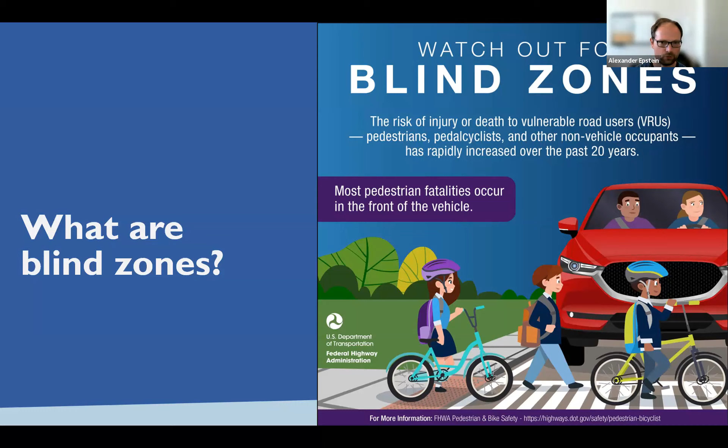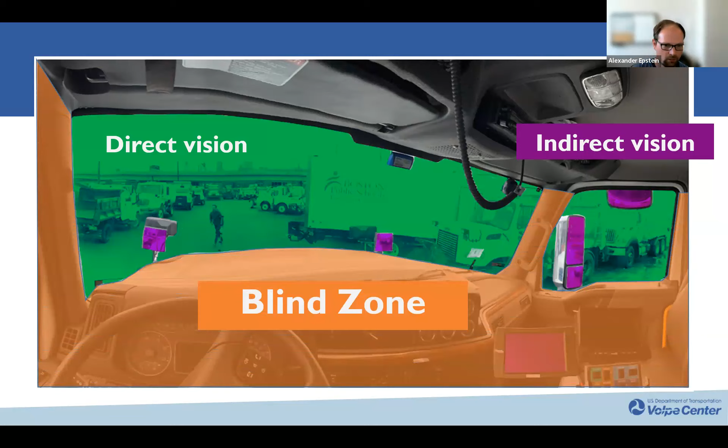So where's the blind zone then? Well, that's everything else. The blind zone, shown in orange, is where the vehicle physically obstructs the visibility of anyone outside the vehicle to the driver. This blind zone can vary a lot in shape and size, and especially in towns and cities where the roads are shared, this can be a pretty big challenge.

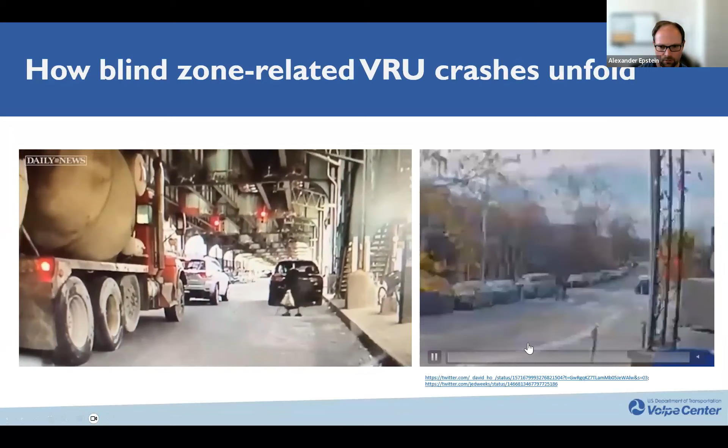The way this can actually play out in real life is multiple ways, either in turning crashes, or these can unfold in vehicles starting from a stop. These can be really horrible situations that are preventable at the end of the day. Now, the person on the right who was struck by the driver of that large pickup truck during a left turn was able to walk away. The woman who crossed in front of the cement truck on the left did not walk away. These are just two examples of how blind zone related crashes can unfold.

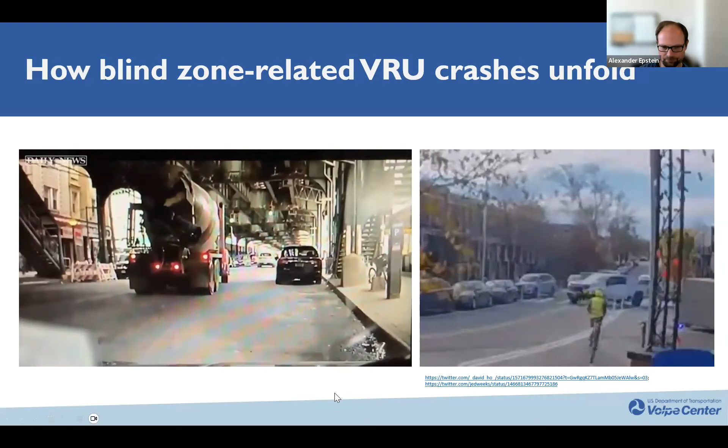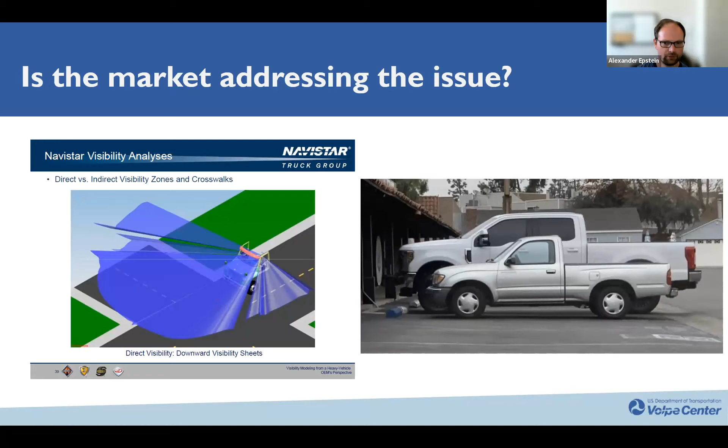One reason it's really important to do that, as opposed to, for example, seeing people through mirrors - you can put up more mirrors for sure, but the reaction time, based on the research, is going to be 50% faster if a driver can see with the naked eye. If they can see a person outside, they can stop significantly faster, and that can be the difference between running the pedestrian down, or not.

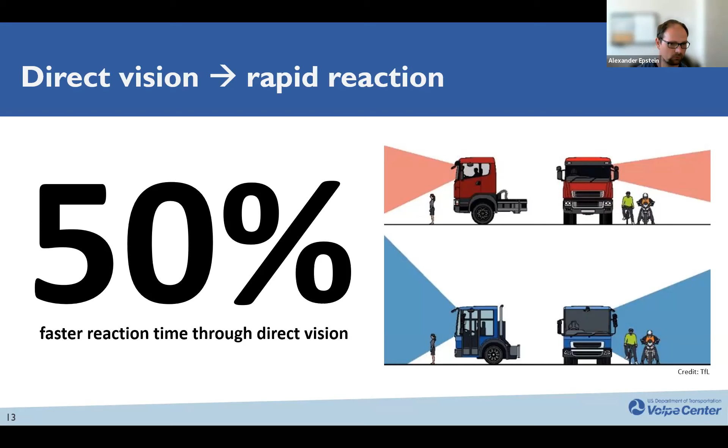To put some numbers around this, the data has challenges and imperfections. But what we do know, based on the best available data, is blind zones are at least the second leading cause of truck-pedestrian crashes in the UK, and at least 1 out of 4 fatal crashes between pedestrians, cyclists, and large trucks in the United States. This is something the NTSB has addressed in the past, issuing recommendations about 10 years ago.

Piecing together what we can, we can put a lower limit of at least 650 fatalities a year, at least 15,000 injuries. In my professional opinion, that number is likely significantly higher.

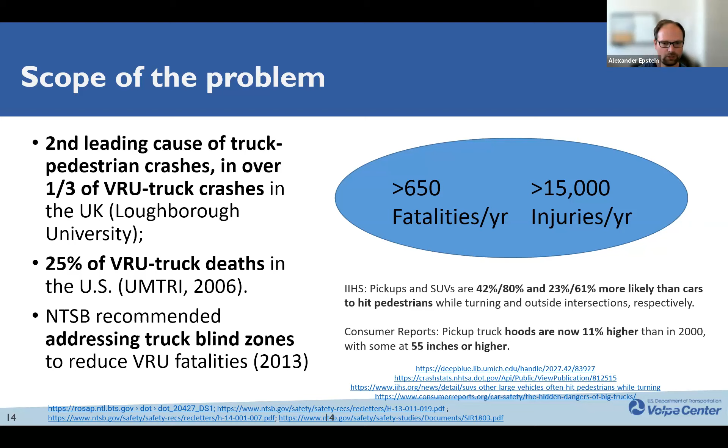The Insurance Institute for Highway Safety and Consumer Reports are all starting to see this, and in their analyses, especially pickups and SUVs being more likely than cars to be in crashes involving pedestrians, especially when turning. And we know the pickup truck hoods are getting taller, not shorter.

So how does this play out? I showed you a couple of videos there. I hope they weren't too disturbing. The point is, I hope they're valuable just to understand how these crashes unfold, and why, again, blind zones are a key factor. So this is something that hopefully will come through.

I'm going to show these two videos. This is from a driver simulation study that our group led last year and published in a paper. These are the exact same simulated crosswalk at a signalized intersection, with people crossing from right to left, left to right, and then the signal's about to change from red to green.

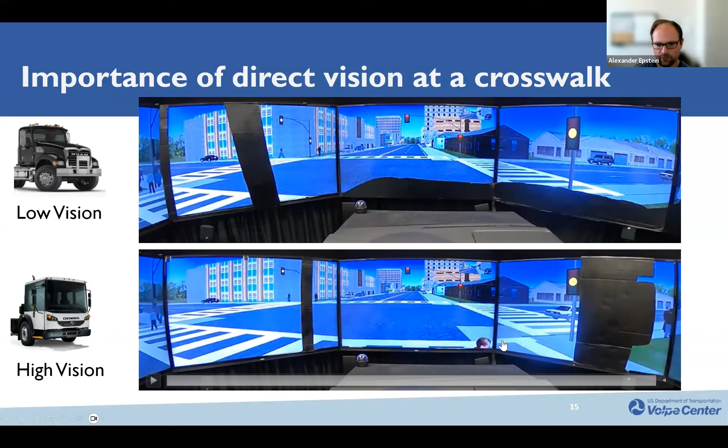The other person in the simulation is sitting in a high vision truck, designed more like an MBTA bus, for example. These are commercially available, and have been for decades in Europe, but at least in the last few years, also in the US. So the little boy there is stranded - what do you think happens? Out of 15 times that the simulation is run with 45 different human subjects, some of whom were professional truck drivers - though the truck drivers didn't do any differently than regular people - out of 15 times, they could have run over the pedestrian in the crosswalk.

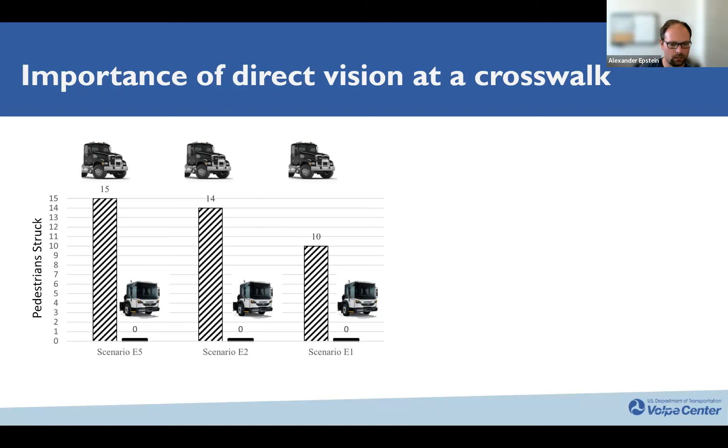The drivers of the low vision truck, when there were five pedestrians crossing, or only 2 pedestrians crossing, ran them down 14 out of 15 times. Even when there was only one person to keep track of, someone entered in front of the vehicle and didn't make it out the other side, they still ran them down 10 out of 15 times when the light turned green. This is in contrast to 0 out of 15 times in the high vision truck. So direct vision really made a big difference, and this is described in our paper published last year in TRR.

There's no reason to believe that it would be any different of an effect with a large pickup truck as opposed to a commercial truck.

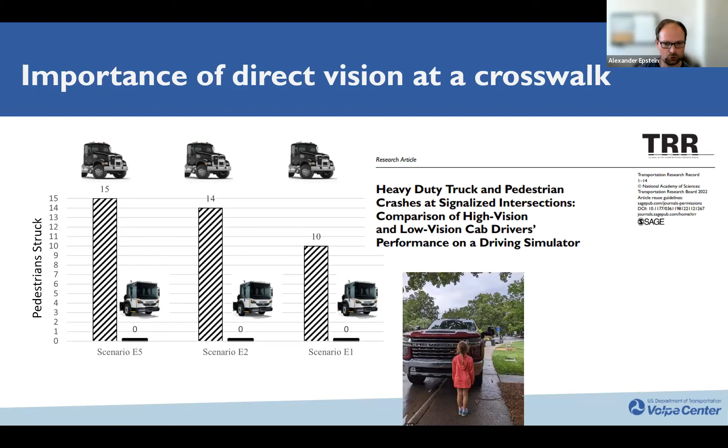So if we all agree that direct vision is an important consideration for the safety of vulnerable road users, people on the outside of the vehicle, how do we measure those blind zones and the amount of direct vision afforded to a driver? Well, that's the purpose of this tool that we've been working on, first started as a university partnership, and then we've been working on it since 2018.

This is a free tool. You can go online, and I'll put the link in the chat. You can enter any vehicle. You have to sit in the vehicle and take a panoramic photo from the eye point of the driver and take a couple of measurements.

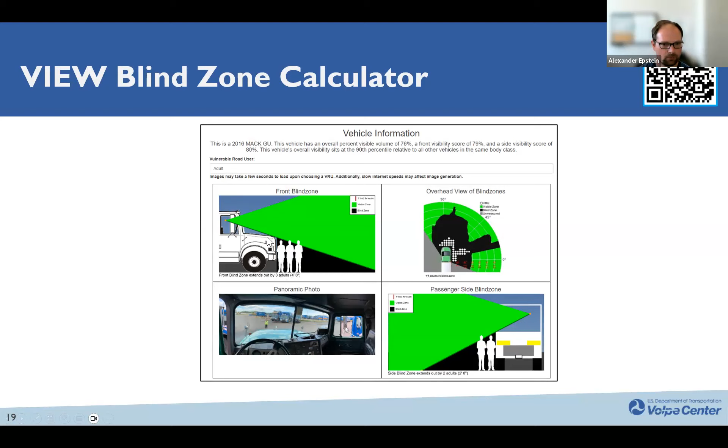What it provides you is an estimate of how many adults, children, people in wheelchairs, or bicyclists, either adult or child, can fit in the blind zone forward, to the right, and ultimately all around the vehicle. Just to decode what the outputs of the tool are...

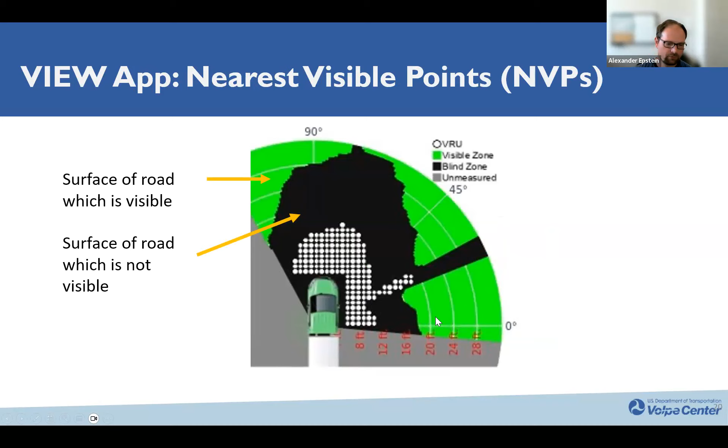This green area is where the surface of the road is visible. The black area is where the surface of the road is not visible. Each of those white dots represents the type of vulnerable road user you've selected—in this case, elementary school children—that could be tiled shoulder to shoulder and still not be visible to the driver in that vehicle. Here it's estimated that 176 elementary school children are not visible, and the road is estimated to not be visible out to about 24 feet in front of that truck.

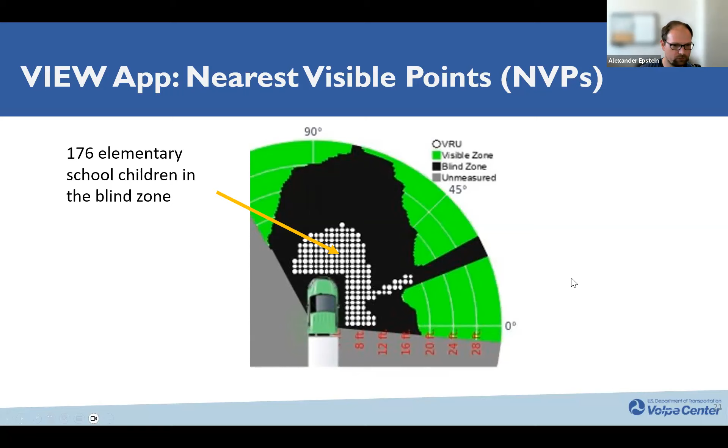So there's a QR code, and I'll also share a link. I thought it might be of interest to you all to share what different groups around the world, and closer to home, might be doing around this safety issue.

For SUVs, pickups, and cars, there's a United Nations regulation called Forward Field of Vision, UN Regulation 125, that governs the minimum field of view. The same is true now for large trucks—it's UN Regulation 167, commercial vehicle direct vision. But those are not abided by in the US market.

So there are a couple of other US standards—well, there's one that I'm aware of, which is the APTA bus procurement guide for transit buses. The American Public Transportation Association does have a forward field of view requirement: you have to be able to see a certain height pole at a certain distance in front. It's a very simple test.

London has really been the leader globally, and they were the instigator for that UN Regulation 167. They started back in 2016-17 implementing a direct vision standard, which came into full force last year. That requires trucks entering the capital district in London to adhere to a minimum visibility so that they can see, especially bicyclists, but also pedestrians outside of the trucks.

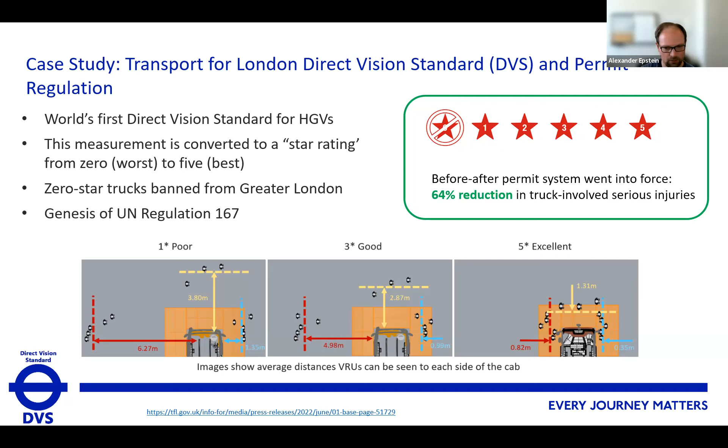Montreal has also been working on this—how do we bring this to North America? They've been thinking about mapping the visibility to different intersections in downtown Montreal. That's a relatively recent conversation we've been having with Quebec.

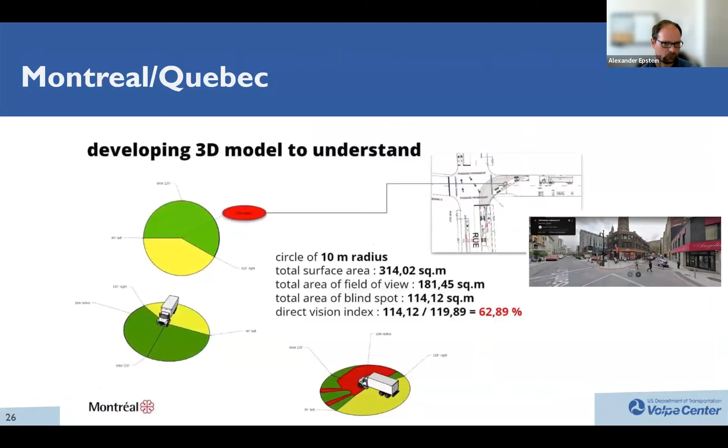Once we know this, there are a couple of approaches. We can change the design of the road. There's a whole toolkit that, depending on where you sit—whether you're responsible for geometry, pavement markings and operations, traffic control devices, or planning priority networks like safe routes to school, bike networks, and truck networks—you can start thinking about.

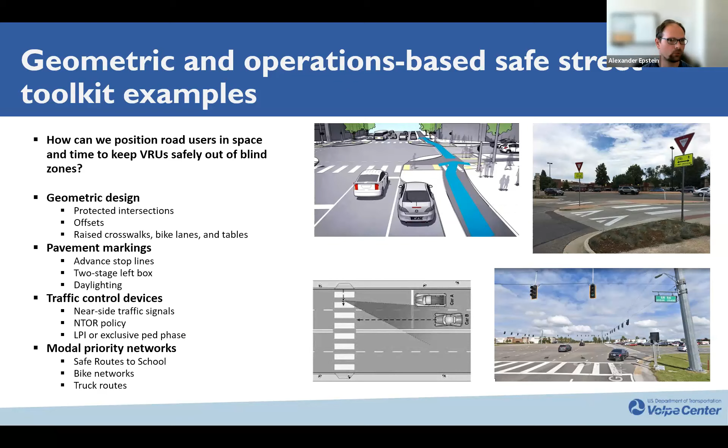If we take the vehicles for granted that they're getting larger, and we have to be aware of their blind zones, there may be ways we can position road users in space and time to keep them safely out of those blind zones. Seattle is an example of a place that has done just that.

It's called Marginal Way—a single corridor from Seattle to south of Seattle through their industrial zone, with no alternative for either the truck or bike priority network. So they are accommodating this. They've spent significant resources to bend these multi-use paths around. You can see in the satellite images those large blind zones of trucks entering the ports.

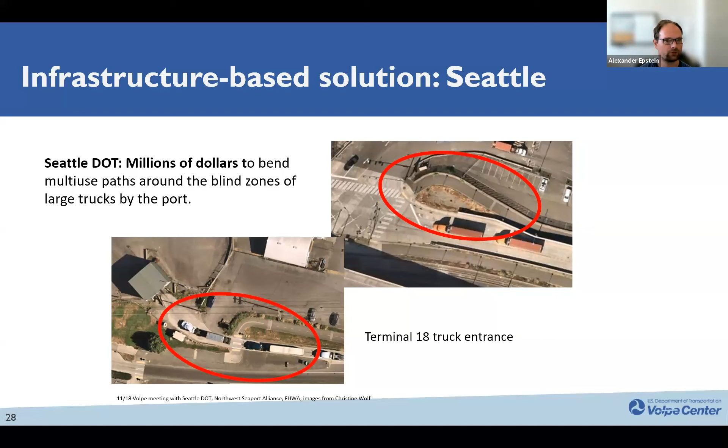Now, you maybe can't imagine doing this in downtown Boston or Framingham or anywhere else, necessarily, because of the real estate. But that's the kind of geometric solution you can imagine with the vehicles we have today.

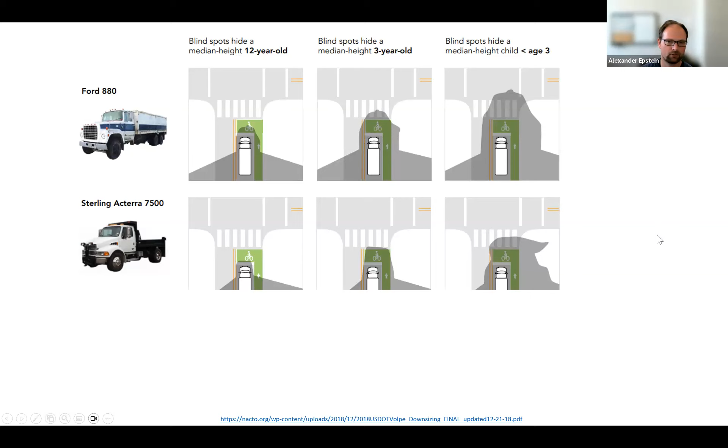If you haven't read these two reports, we talk about this and about direct vision, especially in the downsizing one that NACTO put out a few years ago. Some of that analysis is still pretty fresh—this was before we had the View app. I think it brings together how this is both a vehicle design and a street design challenge. If you start superposing where those blind zones fall on bike lanes and crosswalks, it can be fairly eye-opening, just how different those are even across two different dump trucks.

And never mind if we start asking, well, what about tomorrow's vehicles? Let's say you have this type of electric truck—where would the visibility fall on a typical intersection in Massachusetts?

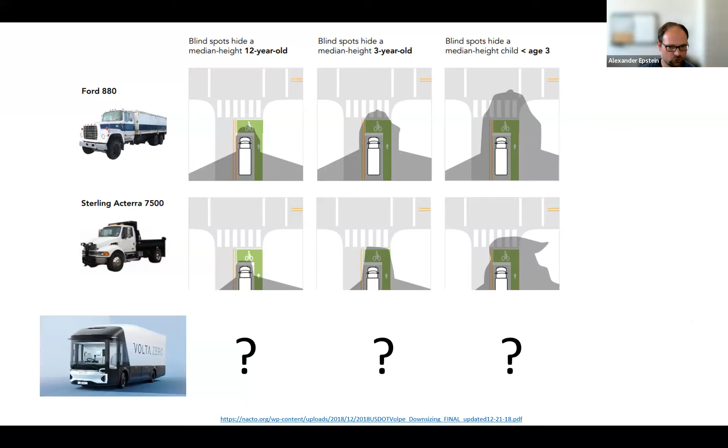So we started going down this road with the City of Boston, and I don't want to in any way steal their thunder—this is just what we've shared at the NACTO conference last month. Over the past six months—and I think I see possibly a former City of Boston person in the audience, so feel free to speak up in the Q&A or chat—very exciting collaboration here, where City of Boston has been thinking about this as well and reached out to us.

We worked together over about six months, measuring their vehicles and thinking about a framework. We're not going to be London tomorrow, but what is a reasonable first step for starting to grapple with this challenge? We measured public works vehicles, school buses, fire apparatus, pickups—everything in between—and put together a simplified method for now.

If you have to crawl before you walk and walk before you run, well, maybe this is the crawl or the walk. We realized that if you take commonly available traffic cones, it's possible to set up a simple method of measuring essentially the shoulder height of an elementary schooler and an adult—5th percentile female in both cases. This so-called cone method could be applied to start mapping out how far out the driver cannot see an adult or an elementary schooler in a crosswalk.

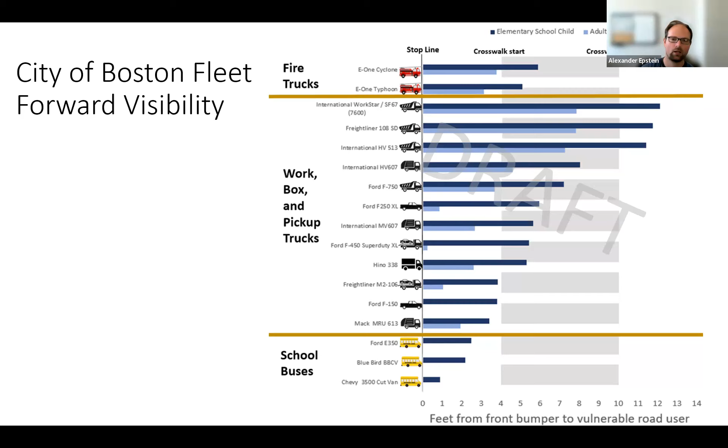That was definitely it - it made an impression on us as researchers, and on Boston as our close partner on this. These are entirely draft. This is what we shared at NACTO, and it's entirely up to the city of Boston how to proceed. But there is some contemplation of how to act on this, and this is a possibility that will be presented for consideration.

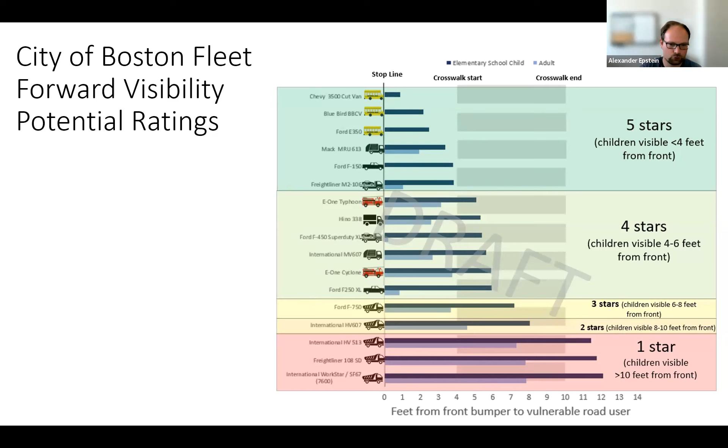So how might a star rating system be applied in the context of a crosswalk and bike lane framework? If we assume that a driver should be able to see a child in a crosswalk if they're doing everything correctly, then this type of star rating is one way that vehicles can be differentiated. You can imagine that being an input to procurement, being an input to contractors, being an input to potentially future other policy avenues.

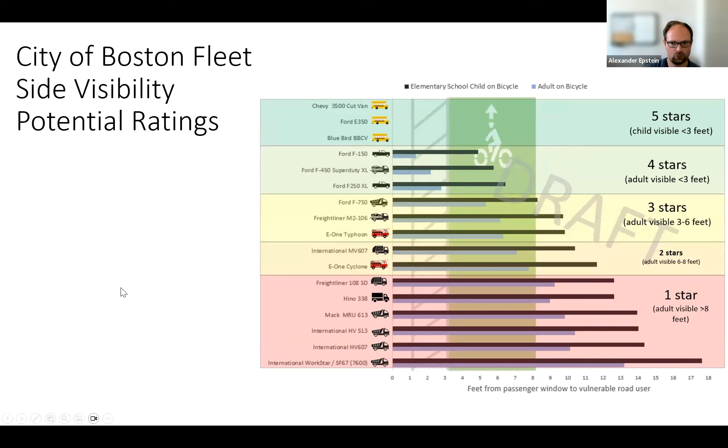And the same for the bike lane - going from highest direct vision to lowest, potentially binning them. This is how we propose potentially doing that for the side visibility. So that's hopefully one way forward for addressing this issue.

We're going to continue working - we have some current research ongoing to determine how vehicle blind zones have changed over the last 3 decades for the same model. So we're doing some foundational research.

At the same time, we're excited to continue our conversations and collaborations with Boston, Montreal, and Quebec, just seeing how we cannot reinvent the wheel, but indeed bring safer visibility vehicles across municipalities, across the state, as well as work with industry.

One thing I didn't mention is there's a nonprofit called Together for Safer Roads that's been quite active in this, and they've also been a great partner. They brought on some of the major fleets like Republic Services and Anheuser-Busch into this conversation. Some of the safety leads in those companies do see the value and importance of this, and have been starting to measure the blind zones of their fleets. So that's an exciting development too.